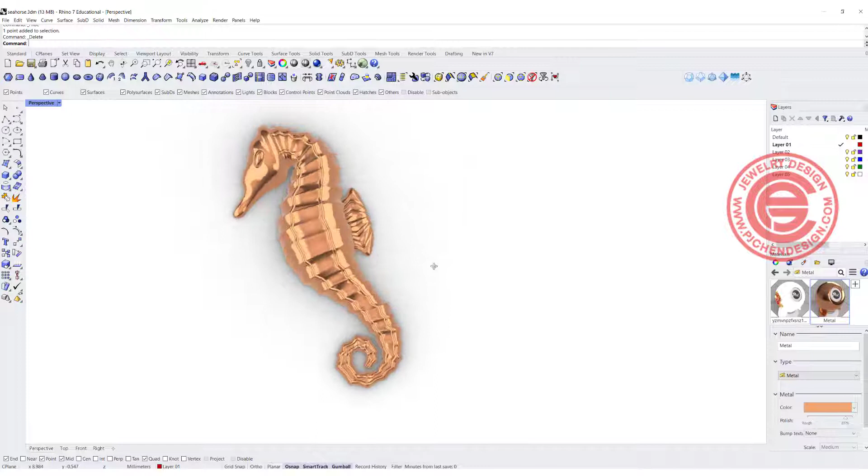Today I would like to show you how to quickly build the surface for this seahorse and create some line decoration on the body. Are you ready? Let's get started.

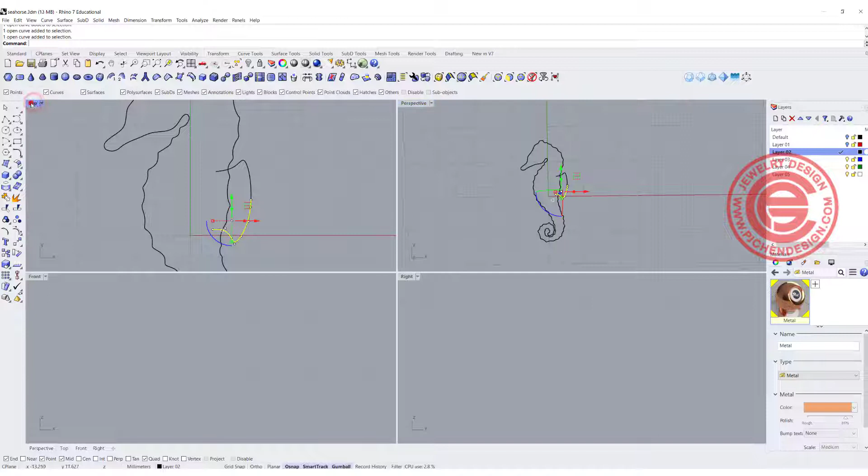Now we want to create the surface. I have one curve right here going all the way to the bottom, and I have the other curve right there. Those lines are flat, so we need to create something three-dimensional. I'm going to come into the perspective view.

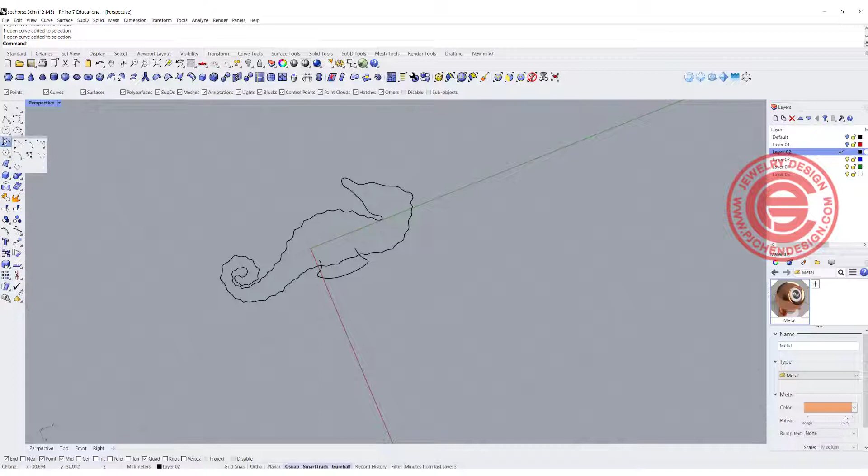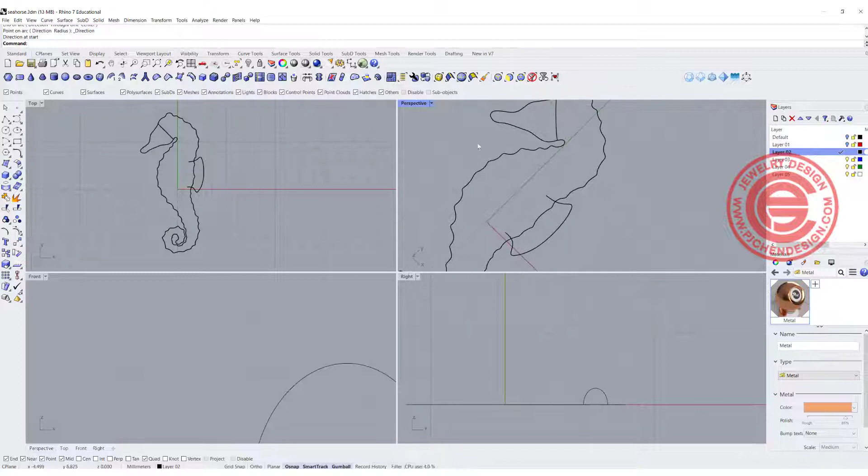First, I want to create one somewhere around the face. I'm going to use the arc tool, the third one, start and then direction. Click it somewhere, make sure your snap is on, and go from here to here. I want to look at all four views, so holding shift to get a nice arc there. The second one, I want to have a big belly, so I'll go somewhere about here with a big arc as well, so I'll have a big belly.

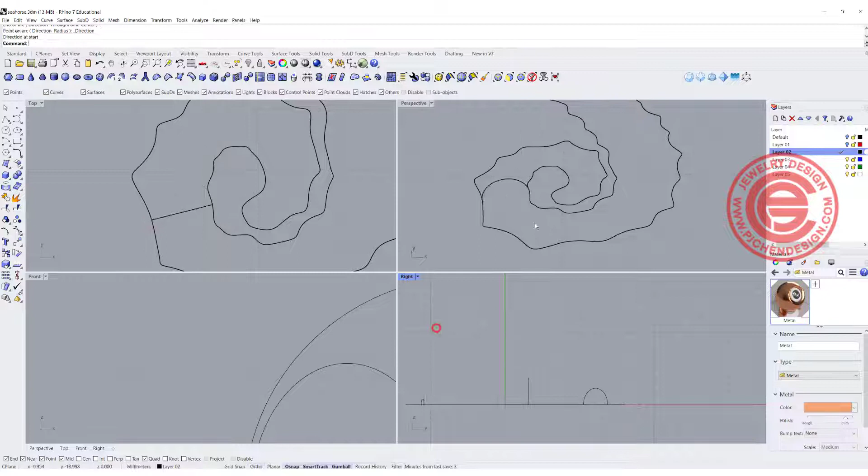Maybe do a little control over here, so I may want to snap into this point, and again come back here. Now I have three cross sections right there.

We are going to use the command Sweep 2 Rails. You've got rail 1, rail 2, and cross section 1, 2, and 3.

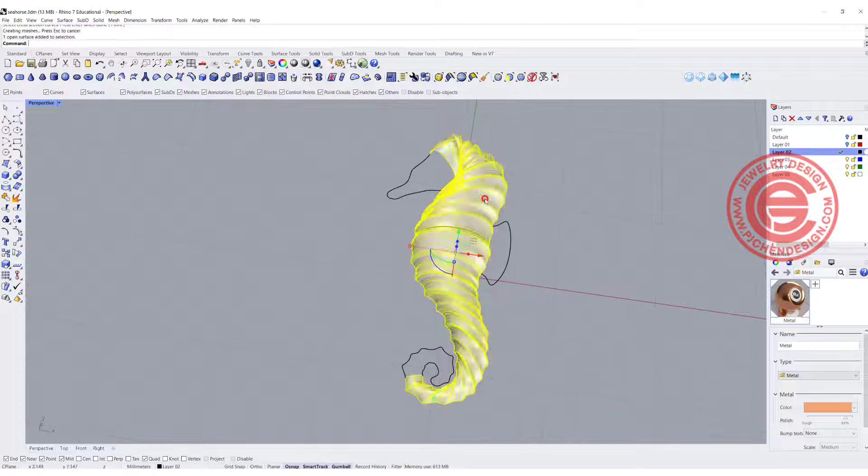Now, what happens if you just click like this, you don't get the head and you don't get the tail. It's because you're telling Rhino you go from this arc to this arc to this arc. So we want to tell Rhino, hey, you want to go from the very beginning to the end - this is what you want to do.

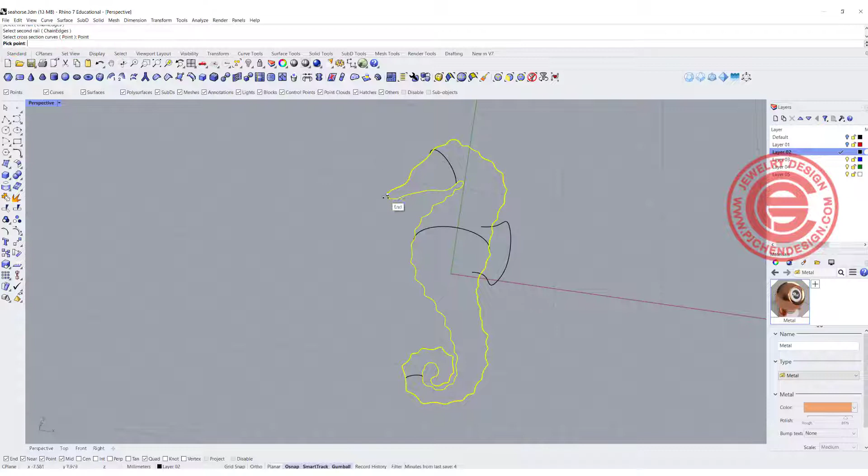Sweep 2 Rail: first you want to choose rail 1, rail 2, and come into the command bar on the top. You've got a click on point, so I want to snap into the endpoint - make sure your endpoint snap is on.

For the second one, you can choose this arc, this arc, this arc. Don't forget to come back to the top, you have a point option, and we want to click on the endpoint as well. All right, so now we have something like this.

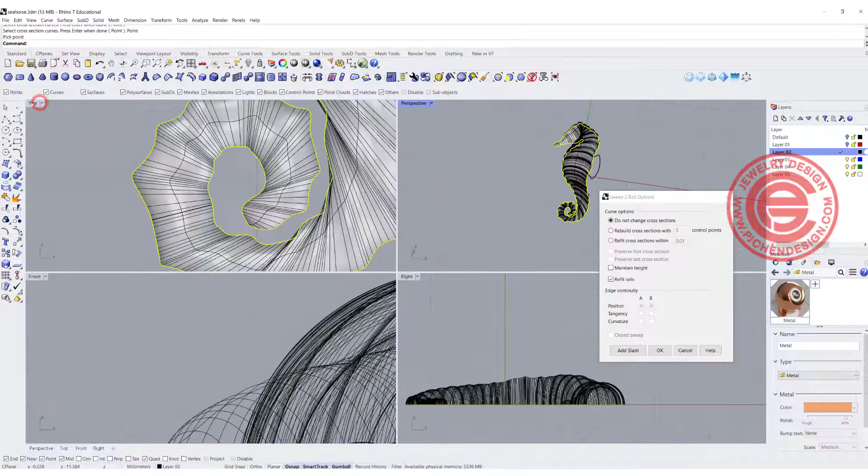Let's take a look at the top view. Notice there's some weird folding over there. It's because two of the curves weren't at the same point, so they create something like that.

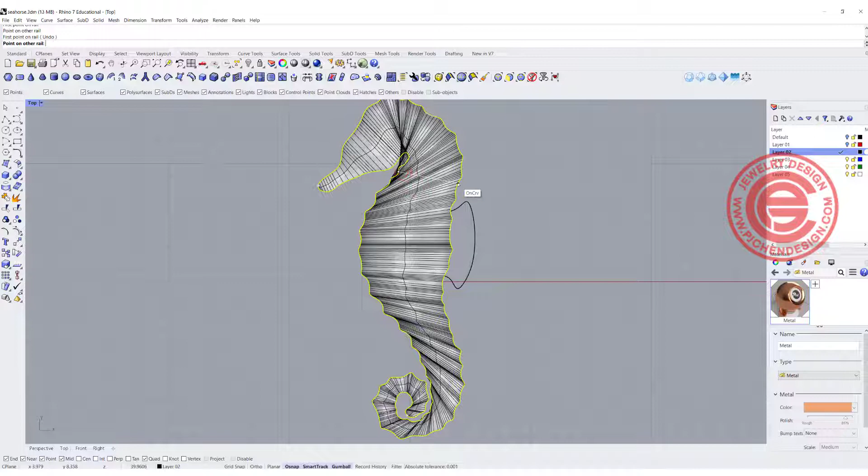We can address that by adding a slash, so that's Add Slash. I want to add one - it's over here, and one over here. Really quickly you can see it's a lot more organized. I want one going somewhere by here, so now this is looking much better.

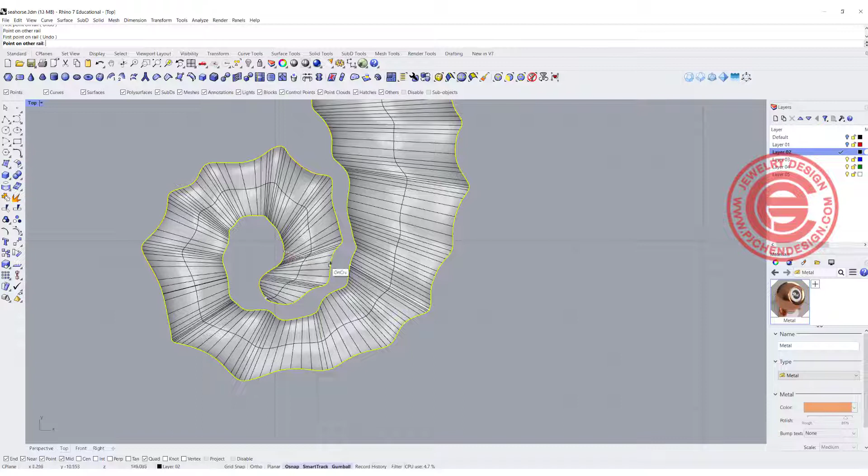Now let's take a look at the bottom. I want to have one over here. To address that, the more curved part will have more twists, so we might need to add a few more over here. We're close to the end, we'll get something like this, maybe a little bit here.

Looking good, just make sure there's no folding over there. All right, so then you click OK. Let's take a look on the render view in our perspective and see if it's looking good.

If you don't like this horizontal bump, you'll actually need to fix the outline on your rail. I intentionally did that, so I'll have those bumps there. Okay, so now I have this.

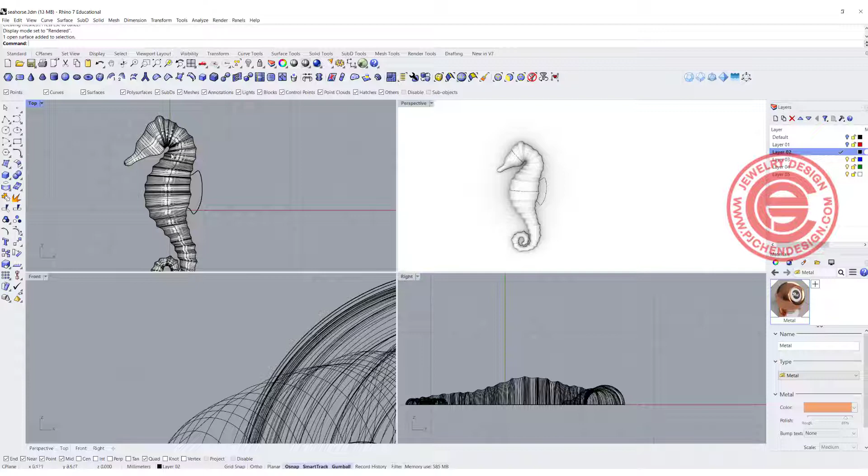I'm going to create some lines in between. So I'm going to use Extract Iso Curve, and we want to extract something - maybe getting two lines there. If this isn't the right direction on yours, you might want to toggle; when you toggle, you can change the direction. Okay, so I do want to have one roughly over here.

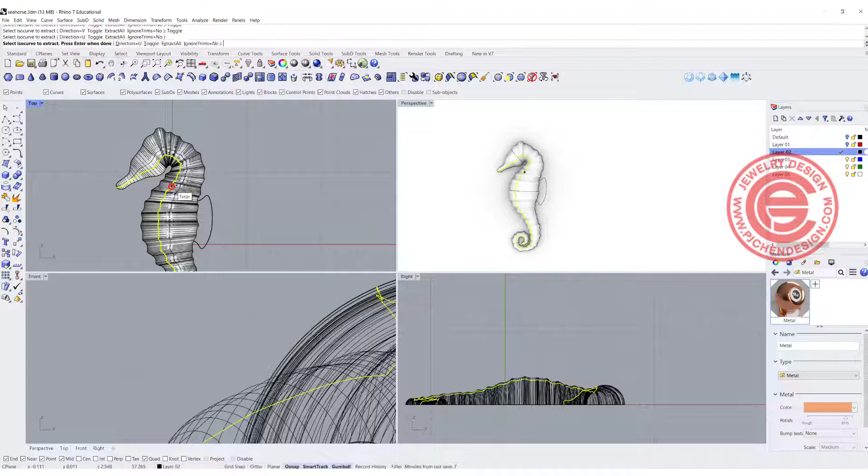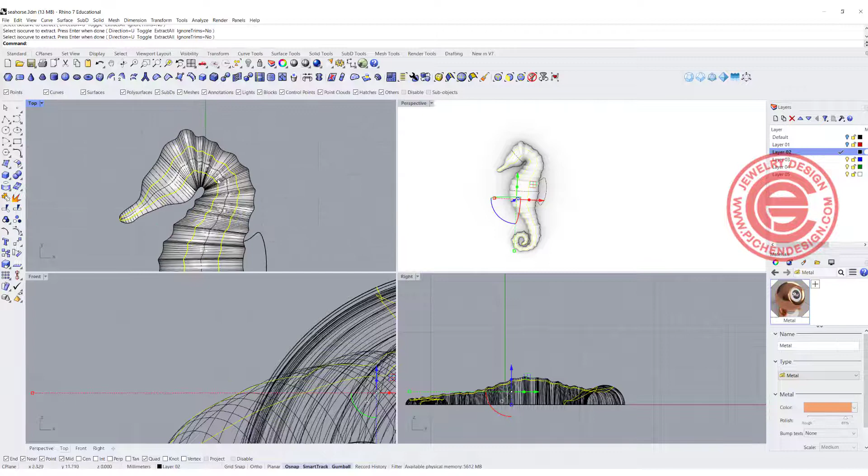And the other one roughly over here. So then I have those two lines that I can pipe. Okay, I do not want to pipe it all the way to the faces. I'm going to set a stone there. And by the way, this is also the line that you can flow the stone on if you want to design a pave over there.

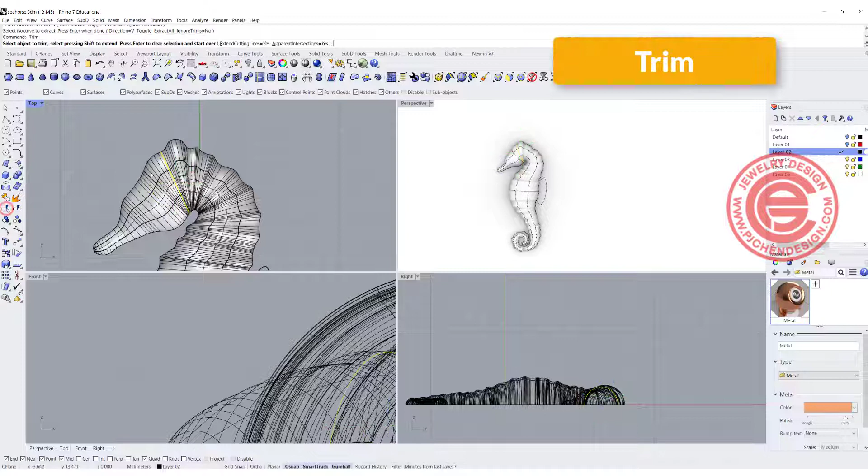Okay, so I'm going to use the ISO curve. That's Extract Isocurve again. And this time I want to toggle, and somewhere about maybe here. So from this point forward, those will be faces. So I don't need the line to go all the way. So let's go ahead and trim somewhere here on this curve, so our curve doesn't go all the way there.

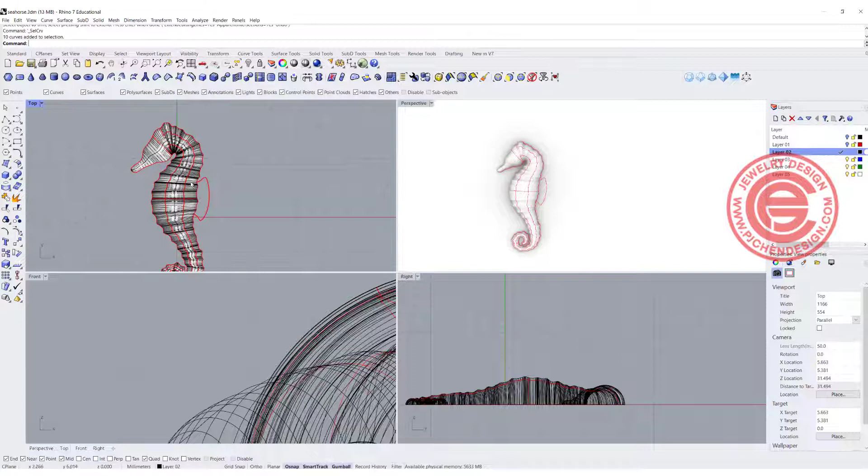All right. So I'm going to select all the curves and mark them in red color, so it's easier for you to see what I'm doing there. All right. So now with this, let's take a look at the perspective in the ghosted view. I'm going to pipe this and see how that goes. So let's try the first one. Our pipe is really just decoration, so it will be really minor.

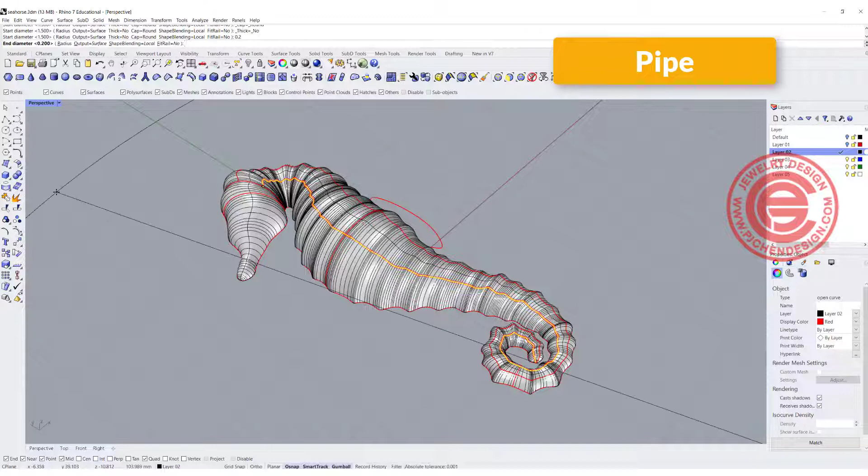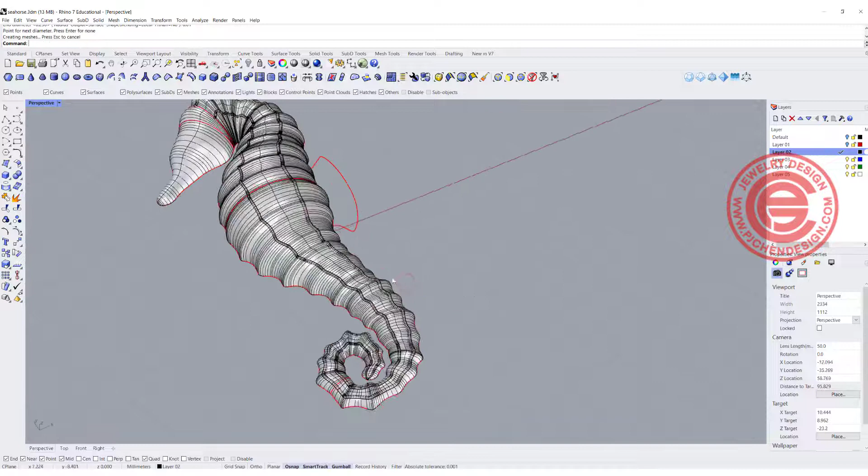So let's go ahead and pipe it something like 0.2 to 0.01, something really, really small. And you can see it goes from 0.2 to almost 0 over there. Okay, and if you like it, you can use the same numbers I use, like 0.2, maybe 0.25, and go to 0.01 and hit enter, and I'll have that. And the same way, you can pipe as many as you want to get this cross section. I'm just using 2 to show you what they look like.

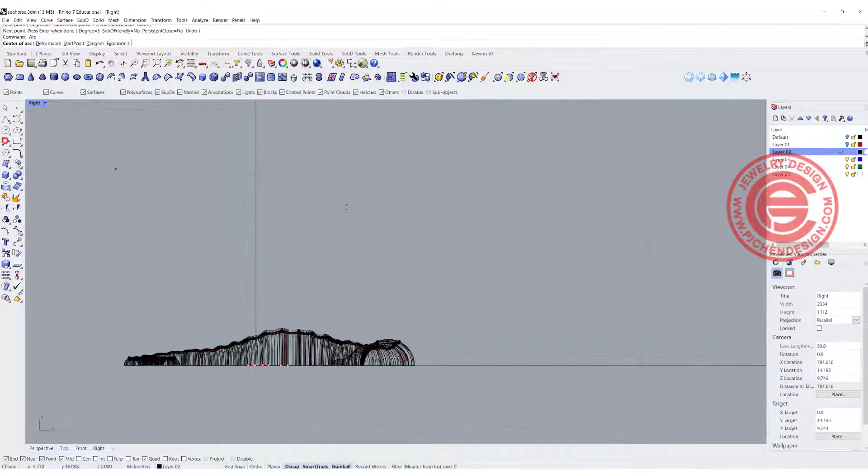Okay, so now we finished the body. We need to work on those fins there. I would like to have a fin with some texture on it as well. So for example, let's go ahead and draw an arc. Huge. This is huge. Scale it down. And then I want them to go not as deep, right? Roughly about the similar size. I also want to do some bumps there.

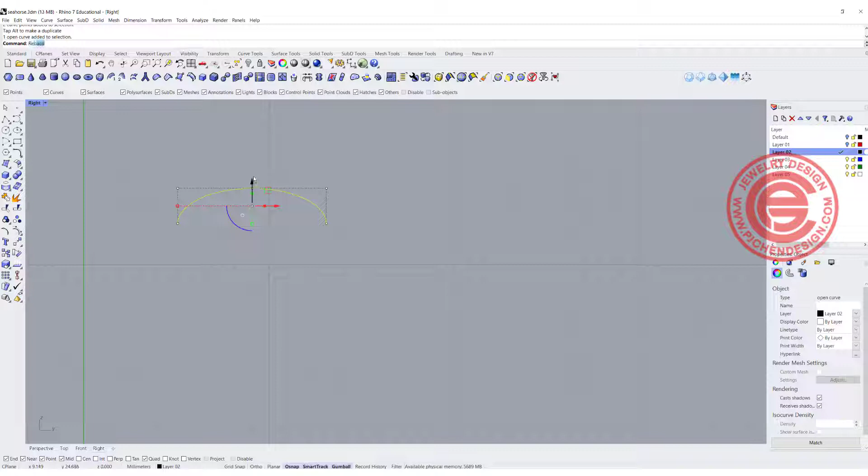Two ways you can do it. You can rebuild to get a lot more points. So let's say 24 of them. And then some of them you just spontaneously start pulling down. That's one way you can do it. Something like this. Like every other one, you can do something like this.

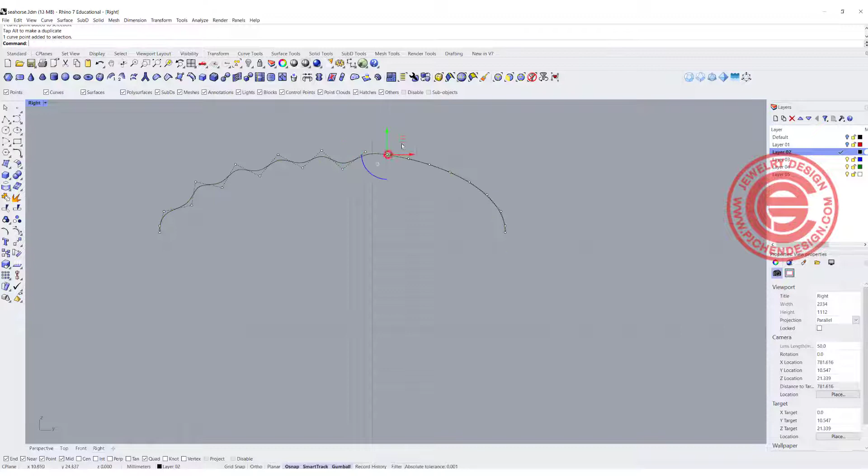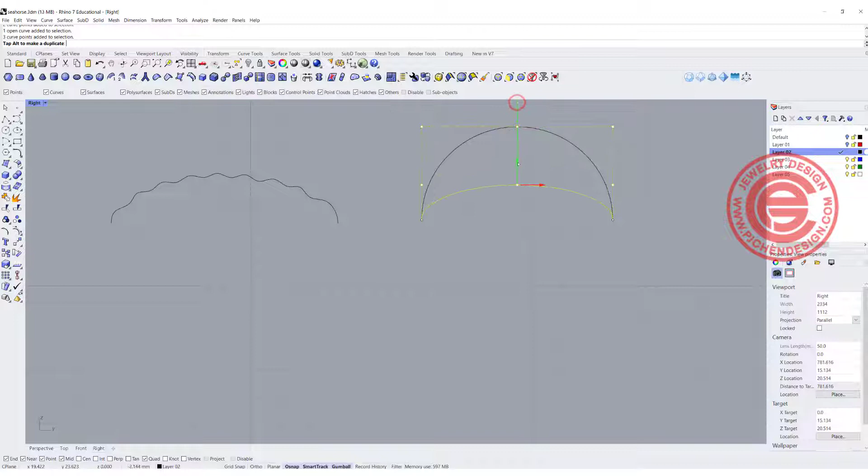Okay. Another way is you can draw all the shapes and then you just trim them. For example, I get another arc going like this and then make it not as tall. And then we're going to draw a bunch of circles. So let's say a circle there, and to be the same size, I'm just going to copy them to spontaneous different places. If you want them to be evenly spaced, you want to use Array Curve.

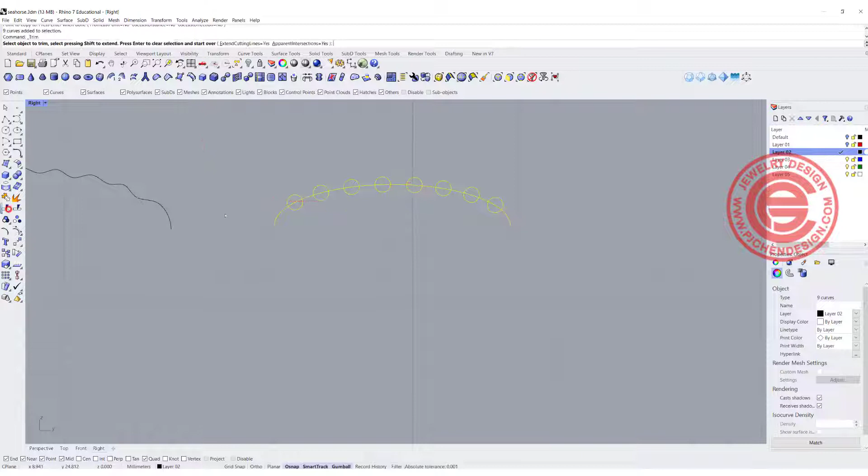Alright, so now with this, I can trim a bunch of them like this. So then on the edge you will have a more crisp line if you want to. Those edges will be really sharp. And also, if you are setting stones on it, you might also want to use this way. And then you can join them together. So either way, either profile will work.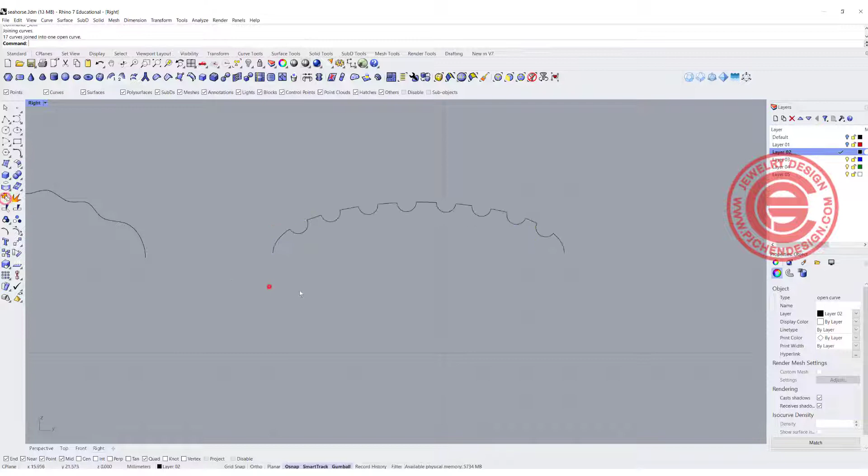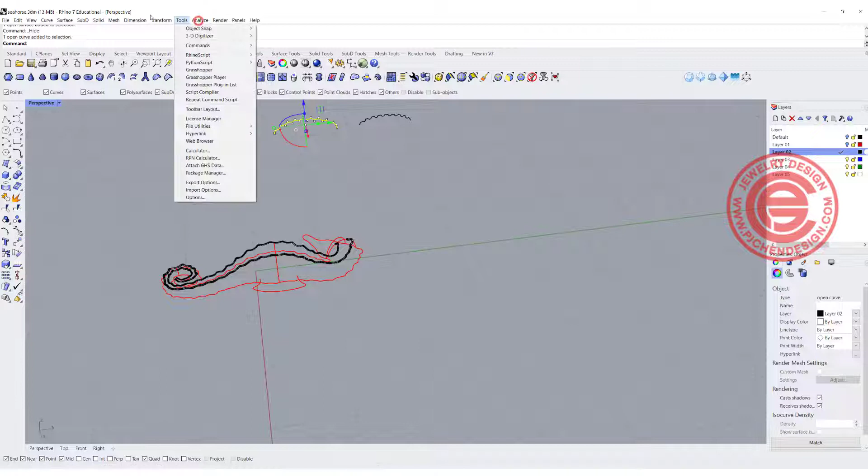Alright, so in this case, I'm looking for something really organic. I'm going to temporarily hide this one so you can see the line there. Alright, so I need this line coming into this location, and it fits exactly in there. So we are going to use Transform, and you have Orient Two Points. What that means is I need to move it to those 2 points, and it will do the 3D scale at the same time.

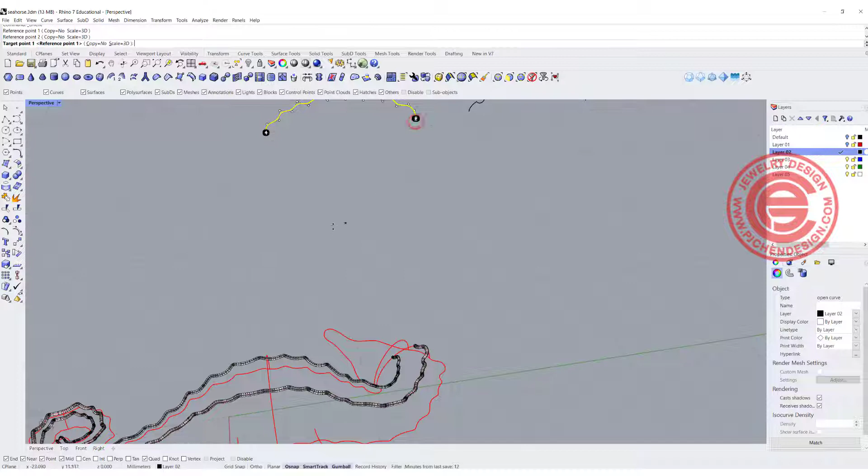So I want to snap to the first reference point, this one. Second is the endpoint on that one. The target will be this one, and coming over here for this one. Alright, so then I get something like this. Now, if you split those two right in the middle, then you can use the sweep tool. Let's give it a try. Sweep 2 rails and cross section, and we'll get something like this.

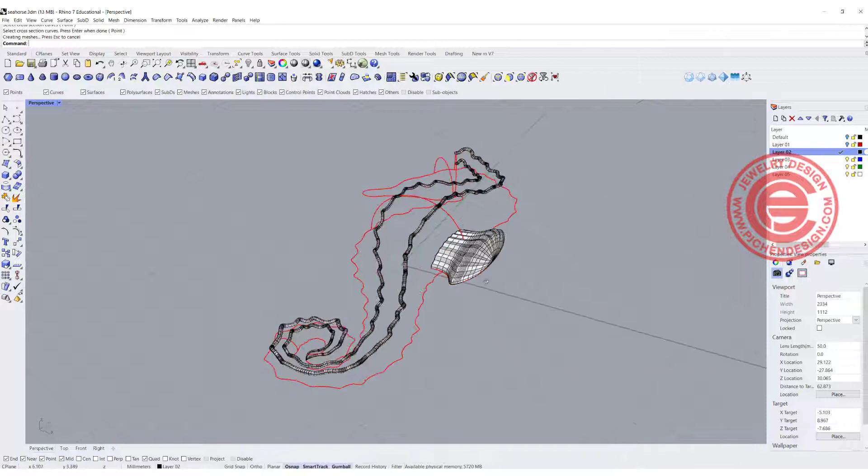Okay, that's not too bad. And then we are going to bring back the body. To make them into solid, we can simply just use the cap command.

One of my fans told me that in German, they cannot just type the command. The cap command is actually right here, it's called cap planar holes. So if you want to go by the icon, it's actually this icon here.

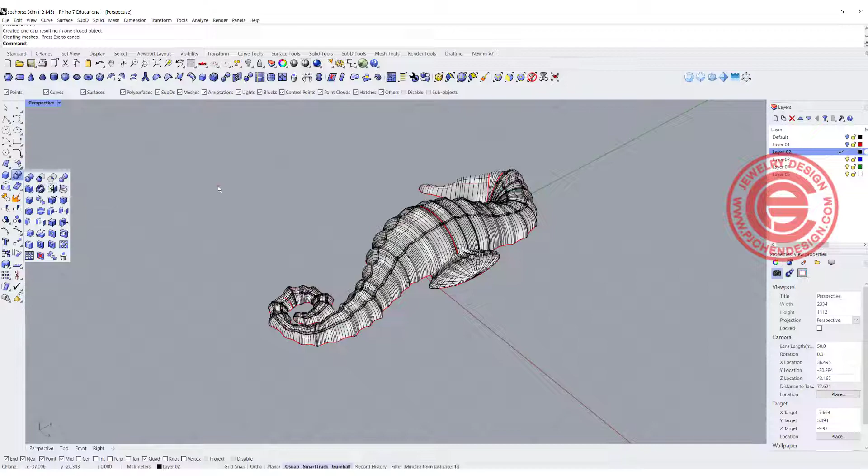Now this one, I'm going to hide this one and show you this one. This one, you cannot cap it. It's because we have two planes that are open.

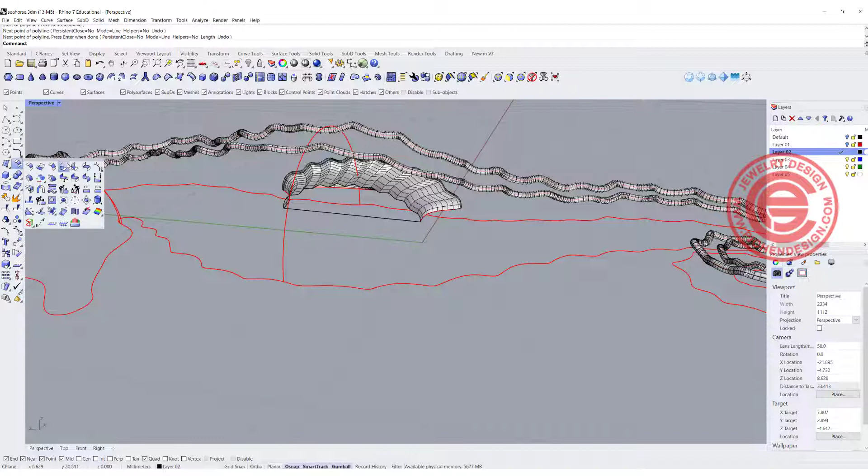So the easiest way is you just draw a straight line going from here to here. Then you are going to use the surface command, surface from two, three, or four curves. You go here and here, those two curves, hit enter.

Then going from the bottom, you have the same command. You're going to go one, two, and three. Hit enter, then you can join them.

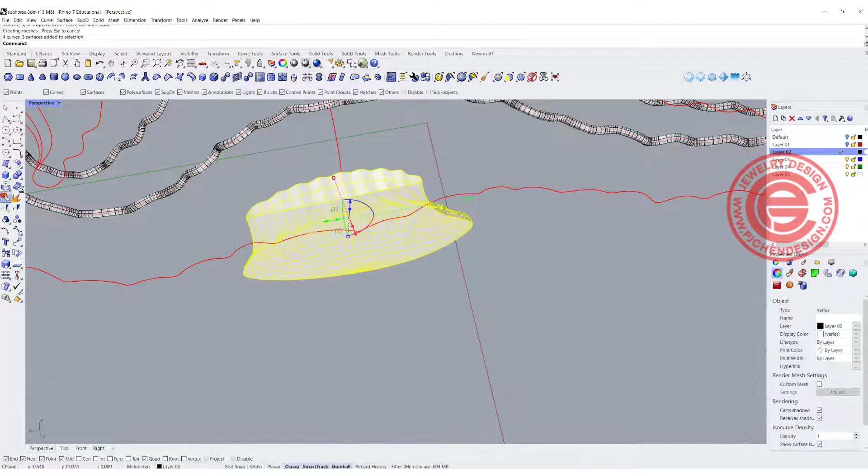Let's turn it back to see what we have there. Perfect. You can fillet those two if you want to.

So the very last one is the eye. I actually would like to have a cabochon stone on it. So first of all, let me draw an ellipse, depending on the size you want.

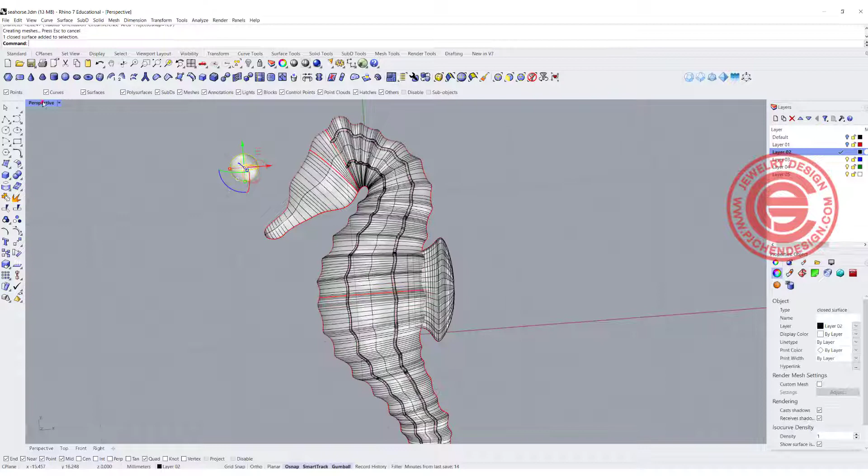I'm just going to eyeball it for whatever size that fits. It's going to be something like this. And it's going to be shadowed a little bit by 1D scaling the gumball.

To have this one, we can simply just move it there, rotate it whatsoever. But I actually like to have them sit on the surface really nicely.

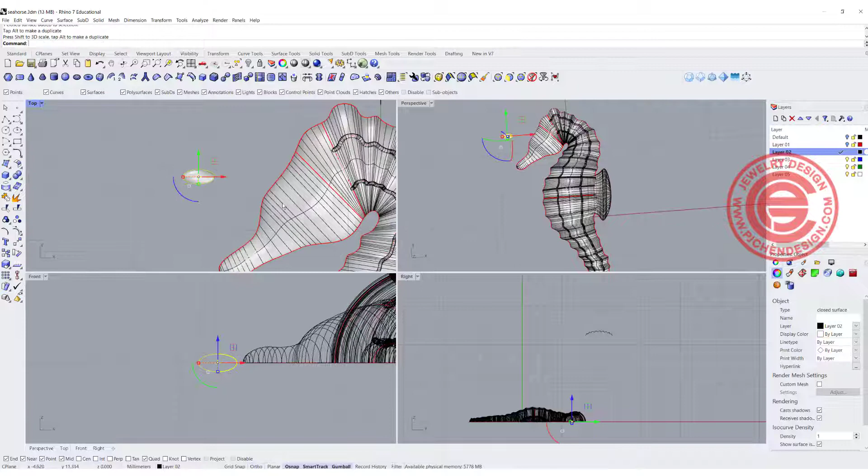So what I'm going to do is drop a dot there, and use the dot to align to the center. Now the dot is actually right in the middle of that stone there.

Of course, your stone can be flat or a ball, whatever that's going to be. So to have this one on this surface, we are going to orient on the surface.

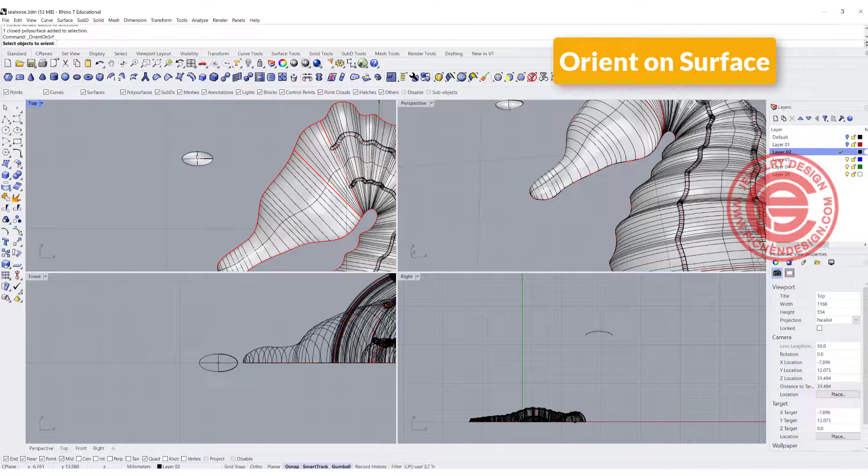So this is the object we want to orient, and the base point, I want to snap into only that point right in the middle. Coming over here on the bottom, on your osnap, you can right click on the point so everybody will be turned off besides the point.

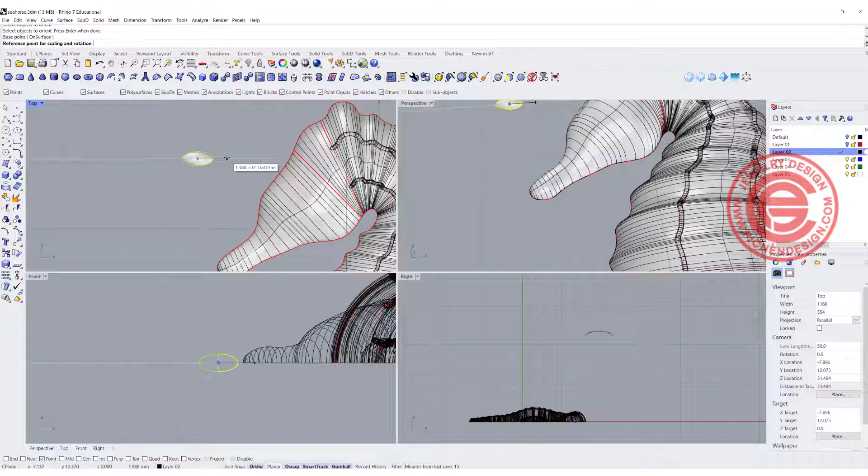Then I can snap to the point, holding your shift and click on anything outside of that object. Then we want to come into the perspective to pick up the surface. Let's click OK. It will be something right here, and hit enter.

So then it will nicely sit on the top. We're going to use this to create a seat for this shape over here.

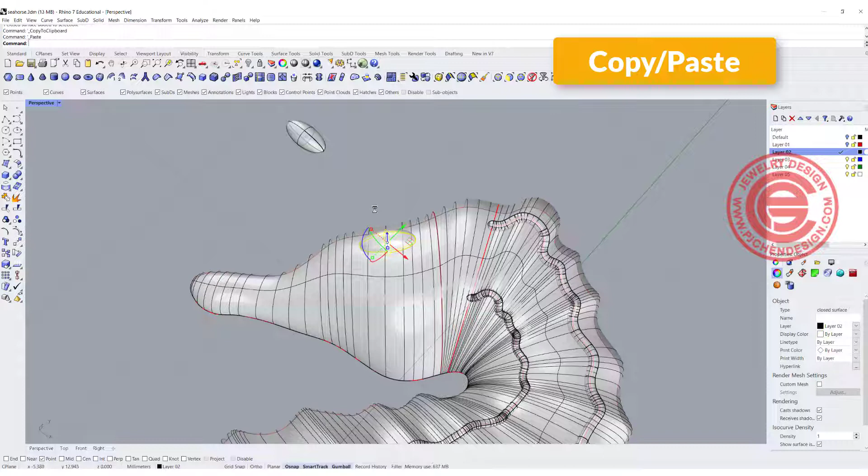I usually like to do it this way. Let's go ahead and copy and paste. So we got two of them there, and one of them I want to make a bit bigger, and we want to boolean difference this one out of that bigger one I just scaled. So we have this sitting in there.

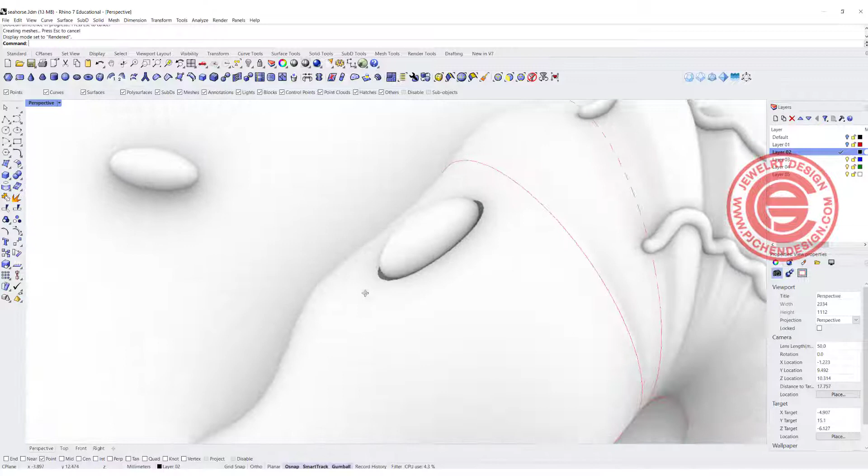But if you look at the render view, everything is nice and rounded beside the eye. It looks like it's sinking into it, right? But it's not as pretty.

So we want to give it a small fillet, something really small. Let's try 0.2 there. So it will look a little bit nicer to fit into the rest of it, something like this. And the render will look nicer too.

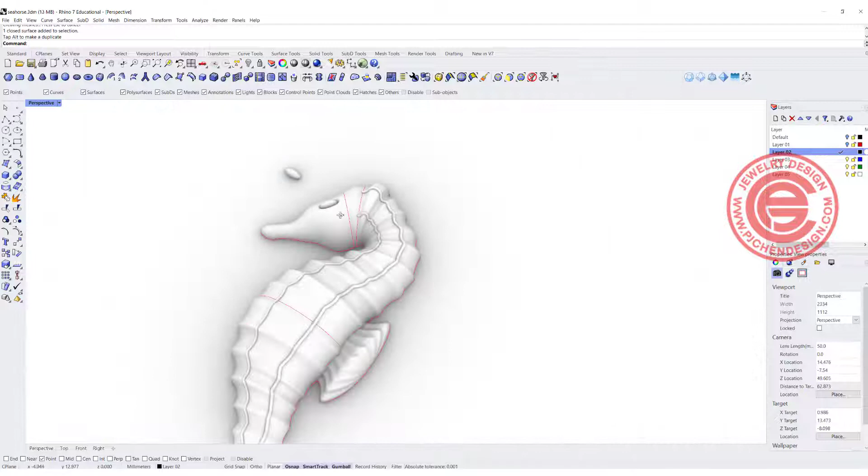Oh, by the way, I need to have a pipe here. So I'm going to pick up this curve and pipe it at 0.3 to feel like it is stopping there. Otherwise, all the curve coming here doesn't look as pretty.

So you can keep adding decoration if you want to extract the ISO curve to get it more curved for piping or sweep.